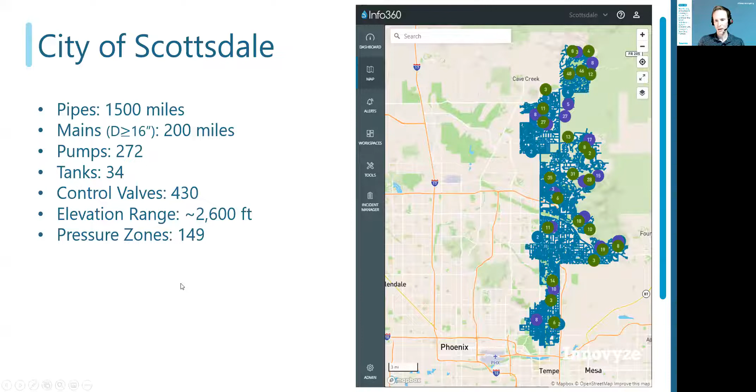So that's their system at a high level, and some of their objectives coming from that is that they want to have dashboards where they could manage the pressure, review pressures throughout the system, get a quick understanding of pressure variations, and have alerts on demand of pressure exceedance instances.

In addition, their system is broken into 4 separate zones or areas, so we are doing mass balance, which basically sums up the volume being used by each isolatable area. I'll highlight which areas we can isolate, since this is not a full DMA system like some of our other global users. So mass balance analytics I'll be getting into.

Also, with a number of their pumps, they are going to be using some of our pump efficiency analytics and reporting, so I'll show that. And then finally, one of the big drivers of this project was model integration. Because we're able to tap into their SCADA data, we can connect that to the model to really streamline model updates, even use the model for operational understanding. So those are some high-level objectives that I'll be stepping through.

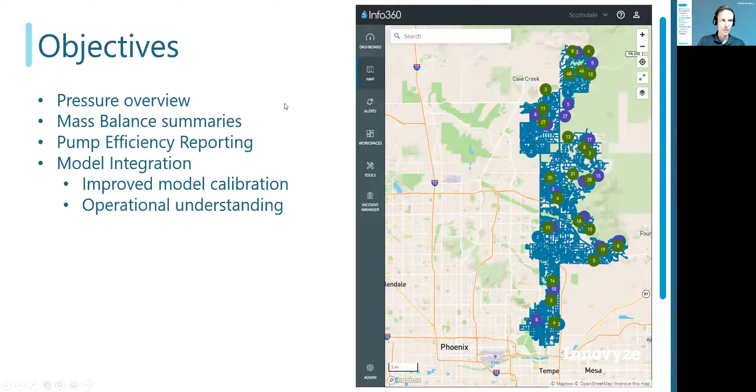As far as the actual project, what that project looks like, we start off with a project kickoff to outline the different timelines and deliverables that we will be working on with them. We define the system - we actually deploy a data ingester, is what we call it.

Info360 itself is completely a cloud solution hosted by Innovyze, and so we have a software component on site that pulls their SCADA data in real time and uploads it to our cloud. I'll come back to that in the next slide. So we import the full sensors and system definitions, and we also upload the model to get the web maps set up. That's step 2.

Step 3 is we actually deploy. So we configure all of the different sensors in their system, we define the pressure zones or DMAs depending on what you have, and we associate each of those sensors or processed sensors with model elements.

And then finally, the actual build phase, and this is where we're still at with Scottsdale, is building custom workspaces, continuing to roll out the analytics for them. Throughout this process, the user has full access to log in, access the site, play around, customize their own dashboards, and give us feedback on the dashboards that we're building with them. So we're kind of at this interactive build phase with them.

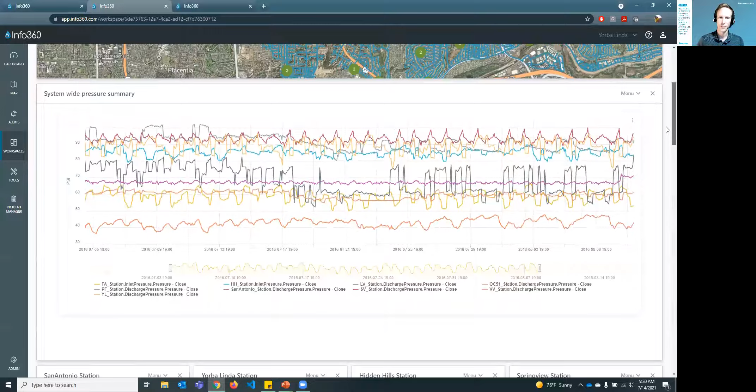So these are different pressure sensors. I can highlight the different pressure sensors, and I can overlay different alert thresholds, moving averages, or other analytics.

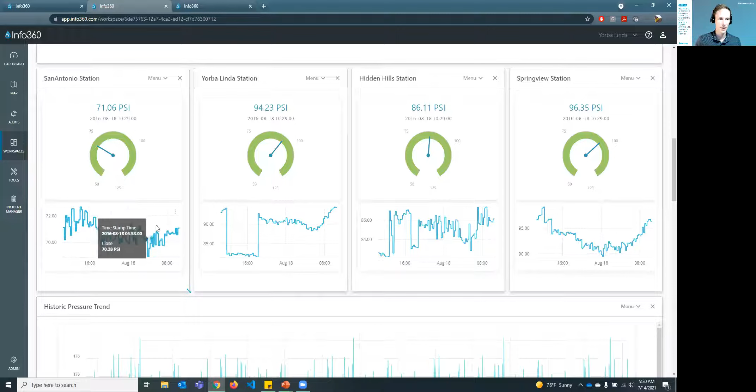If I step down, we can also look at gauge charts. In some cases, operators would rather just see at a glance the snapshot of how things are right now, one for each pressure zone, for example. So this shows the latest value and a peak at the latest 24 hours.

We can also look at a long history. This is 3 years of pressure data overlaid with a moving average, so you can see the instantaneous results compared to that moving trend.

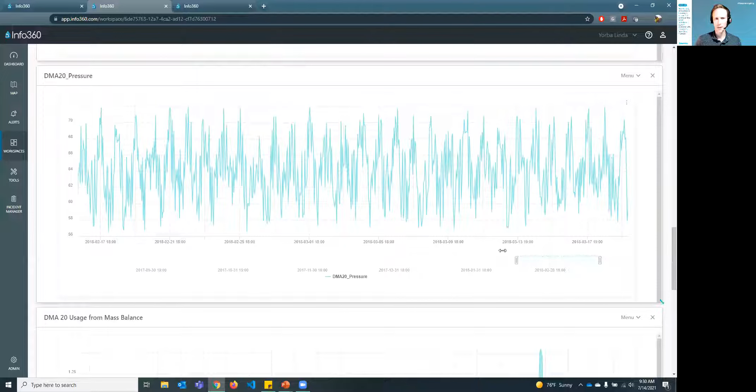Here's another example, I think this is just a 15-minute pressure sensor. You can sift along, and as we get to a certain event, the pressure drops down to around 45 PSI in this zone. One of the nice things about having all of the data accessible is that when that pressure drops, you can easily lay out these workspaces and have access to other sensors.

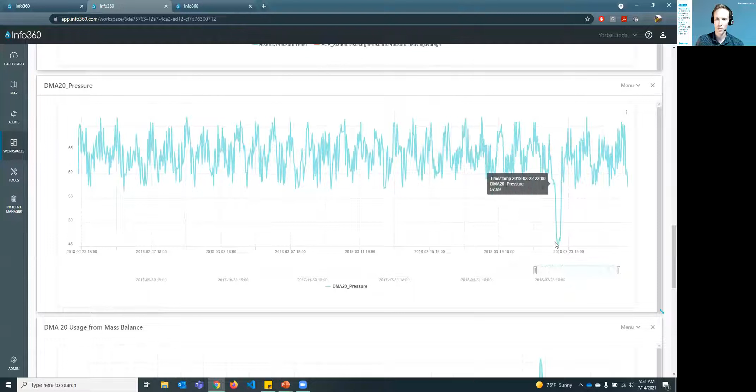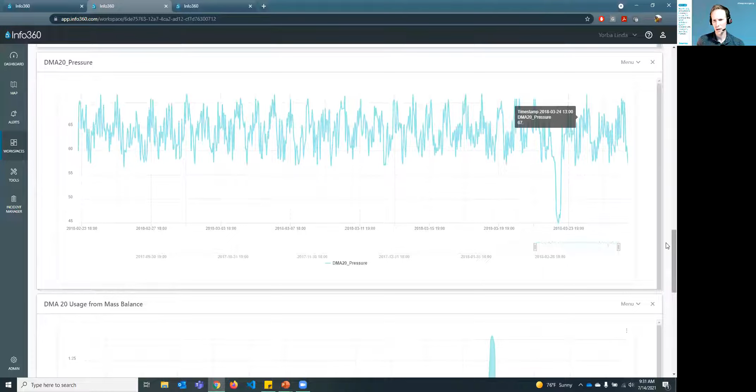A pressure drop by itself, we're not really sure exactly what that means. But one of the things we are doing is calculating the water usage each hour of the day for each zone. So here is the water usage for that same pressure zone where that pressure sensor came from. Corresponding to March 23rd, where that pressure drops, we see a large jump in water usage that same day.

I'll show where we can step to alerts in just a second. But we can also build patterns here.

So in terms of our alert thresholds, I'm going to step over real quick to discard my changes and take a look at alerts.

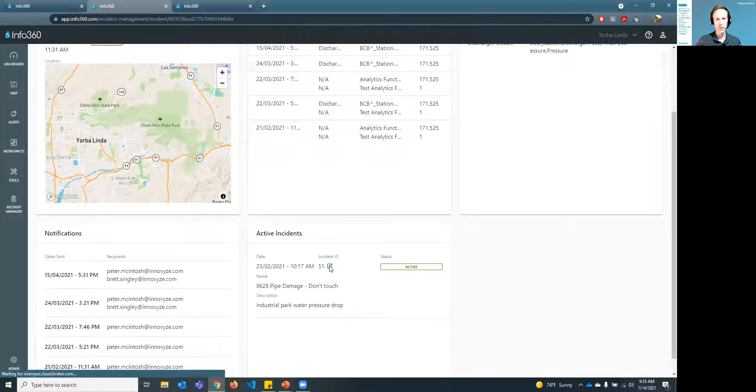Incidents are managed in a separate module within Info360 Insight, where operators and other staff have a common platform to view the timeline of what's happening with the incident. You can see the trigger of the initial alert, dispatch field inspections where workers upload attachments or images, and associate work orders to third-party CMMS systems.

Most importantly, we can also do simulation impact assessments. If I click on this impact assessment, I'll step to a different one. Users have a simple web interface for common workflows to simulate hydraulically what would happen under this incident. In this case, this was a low flow and low pressure alert that was triggered.

Within the UI, non-modelers can set up a basic handful of parameters to trigger a simulation. In this case, we have a symbol where the pipe break was established, on a certain asset, asset 12708. You can define the maximum break flow, and we insert an emitter coefficient on that pipe starting at this time of day, 7 a.m.

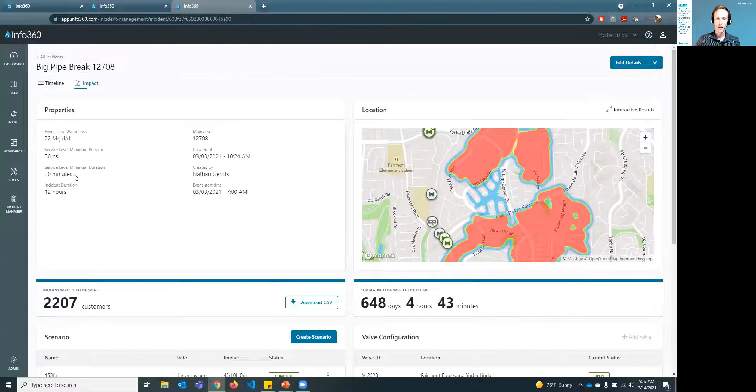We then simulate how many customers would be affected by that condition. In this case, the user can define that customers are affected if they go below 30 PSI for at least 30 minutes. Both of those are user configurable with a default setting.

So in this case, if I zoom out, we have 2,200 customers, and you can see a heat map of where those customers are affected, which sums up to 648 days of total loss of service hours — pretty detrimental to the utility, because I chose a pretty large water main for this impact assessment.

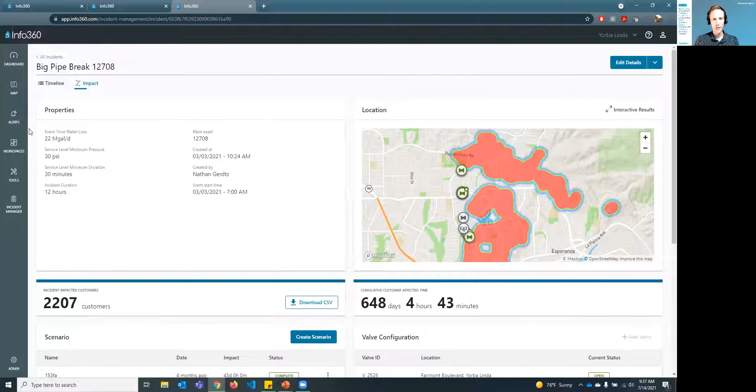Fortunately, because it's on a large main, we're pretty likely to detect it using SCADA. If you don't have that, a customer might even report it within an hour given that magnitude of a pipe break.

We can also view the pipe break within the animation viewer. If I click play, you can see a heat map of where and when we have affected customers. This zone starts to get some supply during the break, but eventually the storage in these upper pressure zones starts to run out, and we'll see affected customers up there starting in these later hours.

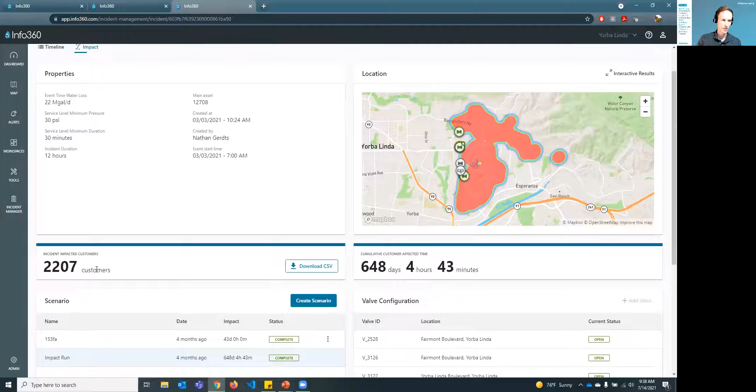The impact actually evolves over time, and in reality a utility will be able to start closing valves before we see all 2,000 customers impacted. With that, you can create new scenarios, and it will detect which valves can be used to isolate that pipe, and you can then close those valves.

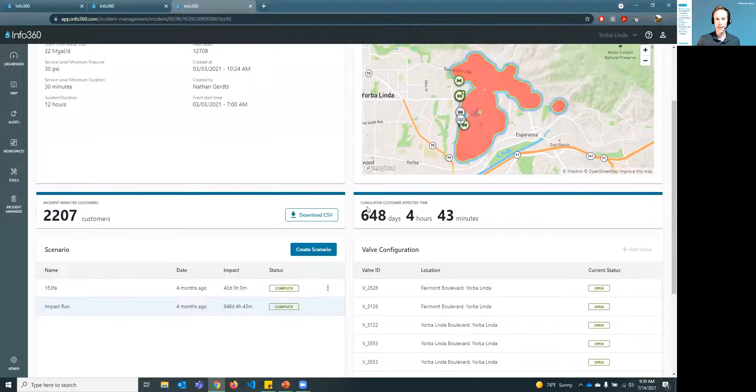You can specify a time. It will detect in our asset database if valves are already flagged as inoperable, or if they're already closed or open. If a user flags a valve as inoperable in the UI, it will then trace downstream from there and find the remaining valves required to isolate it. Then you can simulate various isolation events.

So in this case, you can see once we close off those valves, we only have 86 customers, which are the customers in that one specific closed-off, ponded area from the valves. You can download the CSV, get those GIS coordinates, the customer addresses, and any other information you choose to include in our project shapefile upload that's web mapped.

I think that is some of the main walkthrough of the software. I'm going to step back to PowerPoint to finish off.

Some of the analytics we are setting up for Scottsdale include a mass balance for the water usage. This is where we report the water consumption in an hourly time series for each zone we can isolate, or the total system. And if we have billing data, we can also include the non-revenue water. If it's hourly, we could do a non-revenue time series; otherwise it would just be monthly, depending on whatever time scale you have for that billing data.

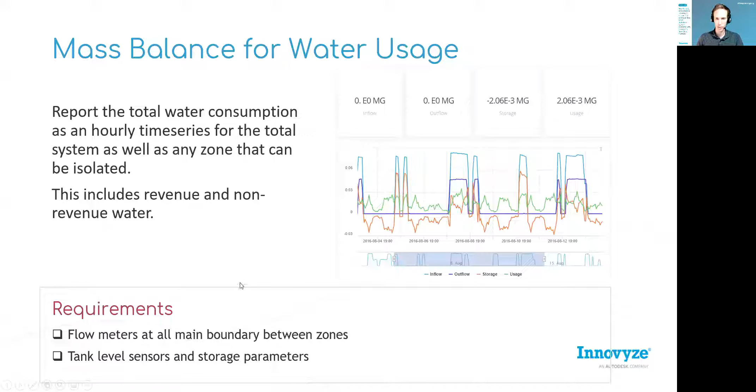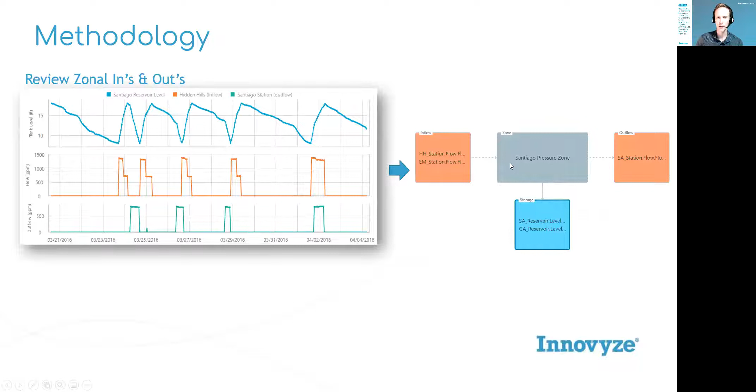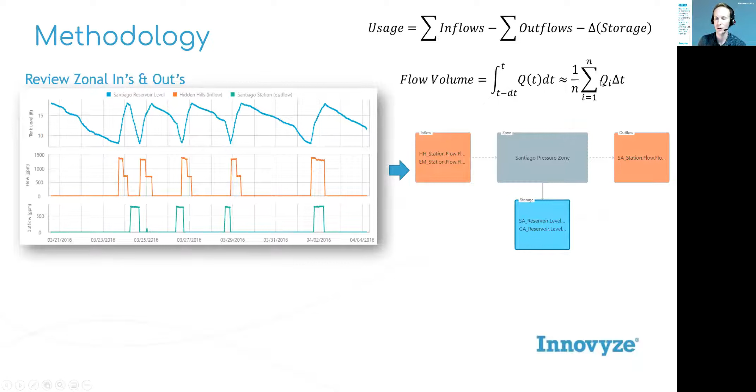The requirements are flow meters at all main boundaries between the zones, and tank levels with their storage parameters. Just a quick note on the methodology: if you have a zone where we have a tank level going up and down, and pump stations flowing in and pump stations flowing out, from the UI we can just drag in those corresponding sensors into our mass balance network. We do simple mathematics, summing up the inflow volumes. For the flow, we integrate the volume over time based on the time steps you have for your actual flow data, and the outcome is that diurnal time series.

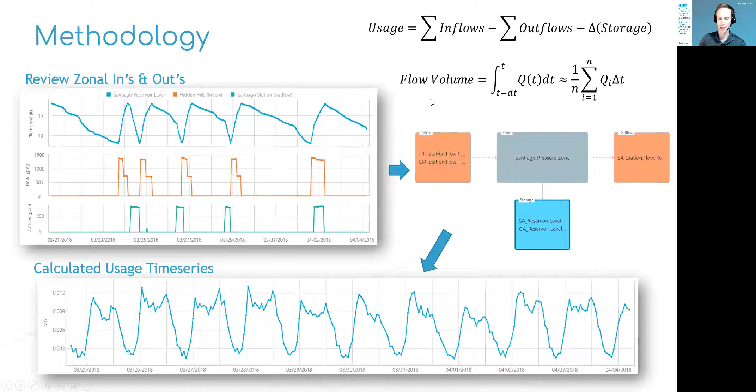This is a pretty foundational thing that you may already have if your system has DMAs, but I know in North America, where Scottsdale is, not many have this, or not many have the paring down at this kind of scale. So where can we set this up?

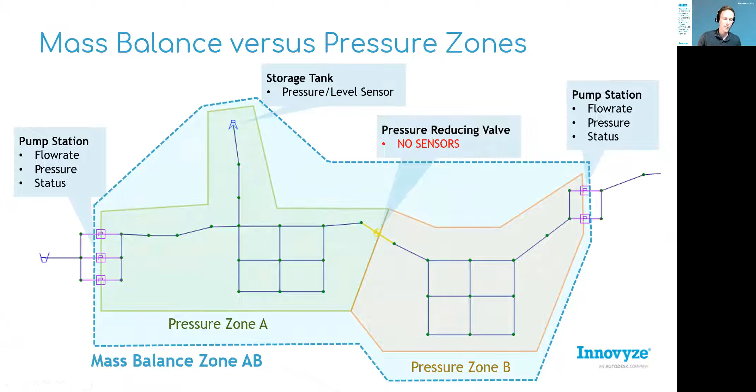That's one of the things we're going through with Scottsdale. They have 149 different pressure zones, but they have a lot of instances where there are PRVs where we can't isolate, so we are doing mass balance where we lump together zones. There are a lot of benefits, where we can do leakage reporting and burst analysis on those lumped-together zones, and then we can help them identify prioritized locations where adding a flow sensor can divide up your analytics and get you a lot more value out of what you have.

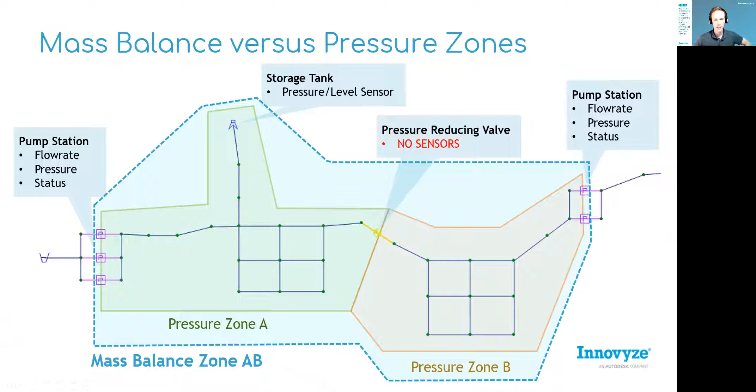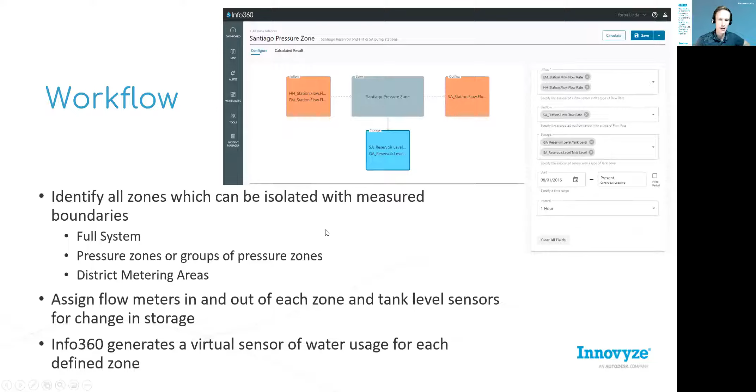So the workflow — this is the UI. Don't need to go into too many details because we can help set this up during our implementation, but there's a UI where it's pretty seamless to just drag in the sensors for the inflows, outflows, and storage and set that up. Then it generates that time series like a virtual sensor in real time.

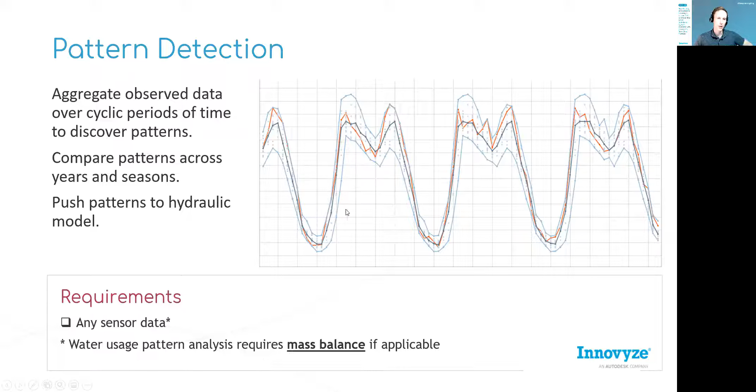Step two, the outcome of that is we can do pattern detection. Here we aggregate together the patterns from that data. This is a chart looking at water usage where we overlay the current values, in orange, against a moving average of the past two weeks in dark gray, and the high and low range from those last two weeks. We can do pattern detection on any sensor you have, but it's of particular value on the water usage — that would use the mass balance if we have that available.

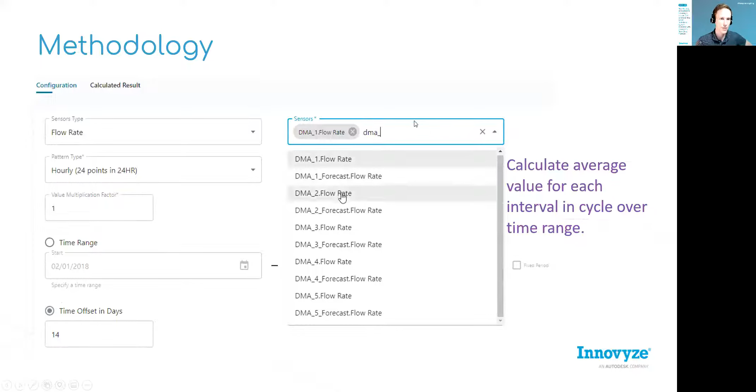There's a pretty simple UI, so we can set this up for your mass balance, but users can customize these different patterns pretty easily using the interface.

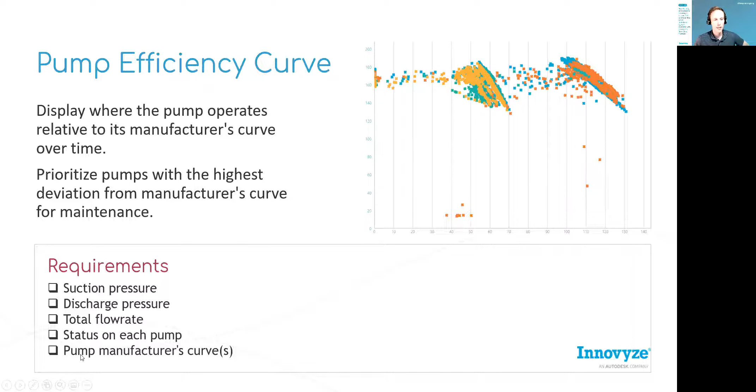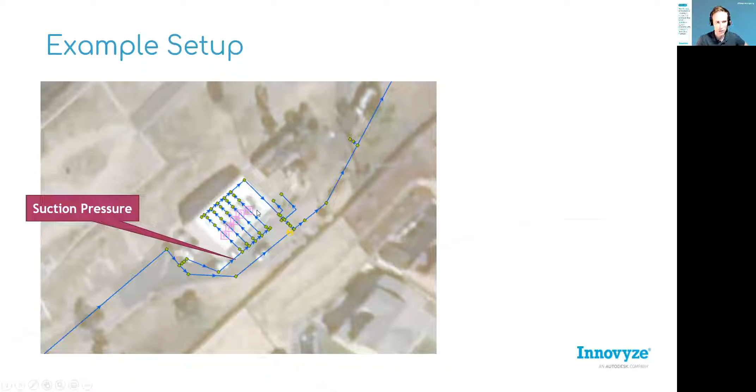Just a quick look at what that looks like. So if this is a pump station with the flow directions, we usually have a suction pressure sensor around there, and a discharge pressure sensor. We need the total flow rate. Usually in SCADA there might be graphs like this that we can generate.

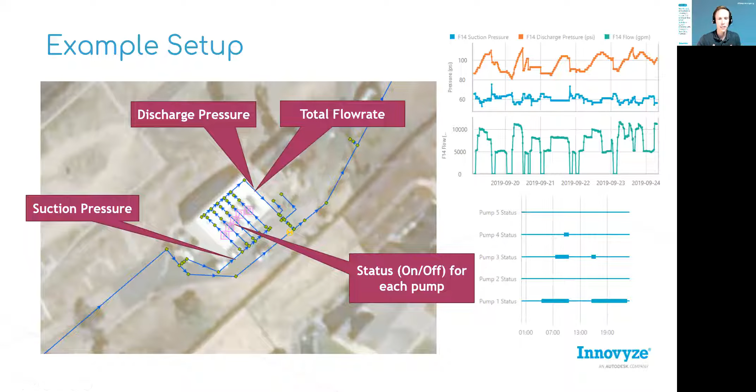And we also need, in this case, if there's 5 different pumps, we would need the status sensor for each pump so we can use these statuses to filter out the total head difference and flow rates, and then filter out the times when each individual pump is operating by itself, so we can isolate individual pump performance. So we don't need pressure or flow on each individual pump, just for the full station, but we do need the status on each individual pump.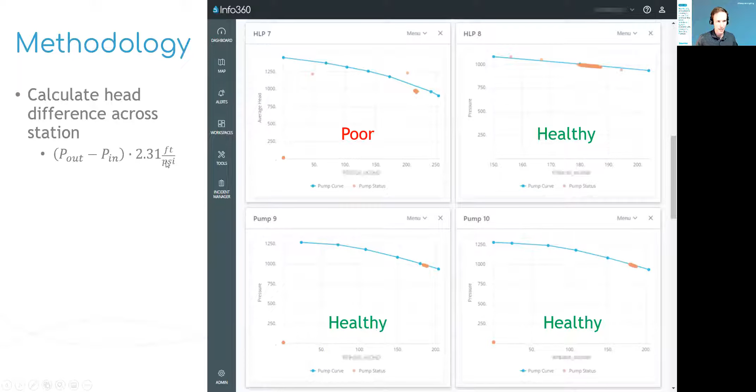The methodology is we take those pressure sensors in and out, and take the pressure difference. For our US customers, they're usually in PSI, so we convert it to feet using a simple 2.31 factor. Then we filter out flow rate time series for each individual pump, and plot the scatter of those instantaneous values for flow versus head, and compare it with the manufacturer's curve.

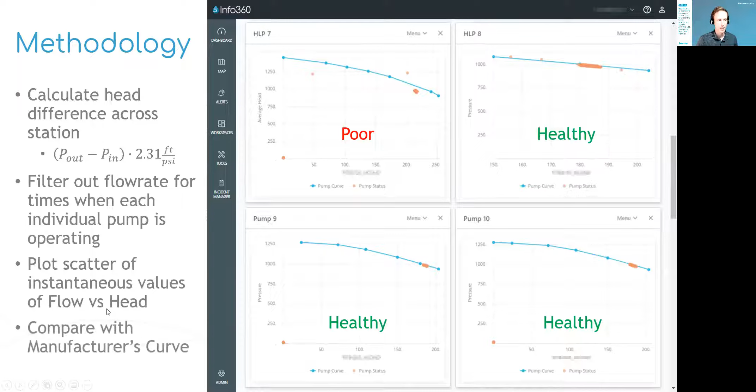We can then potentially take it a step further and turn that into a KPI for each pump. So in a schematic look, for each individual pump, each time step that the pump is running alone, we calculate the head difference. Then we look up the total flow from the head curve, from the manufacturer's curve, for that amount of head - that's value X. Then we compare that to the actual measured flow, and we can come up with an efficiency coefficient.

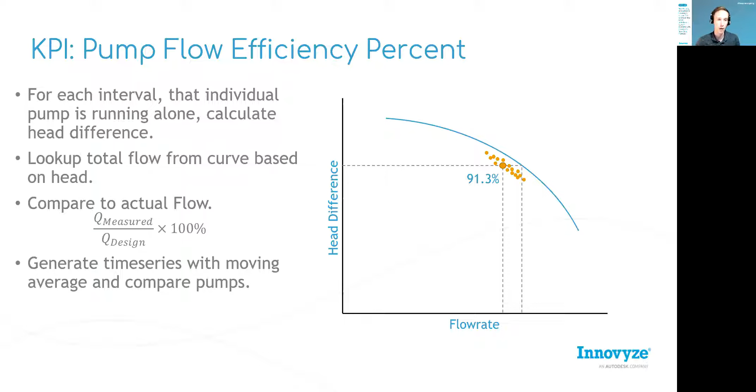For instance, for this point, that might be 91.3% of the hypothetical manufacturer's flow for that head difference that the pump is actually delivering. That 91.3% is one value, but we could generate a time series of many different values as that pump operates at different points in time, come up with a moving average time series, and then compare that across pumps to see which pumps are the farthest off the curve versus others.

We can also do break impact assessment. I showed a little bit of this in the software, but ultimately, once we have your model connected to SCADA, we can set up those dashboards. The requirements for that are we really just need an up-to-date hydraulic model of the system, and having the SCADA integrated is a key step in getting the model up to date.

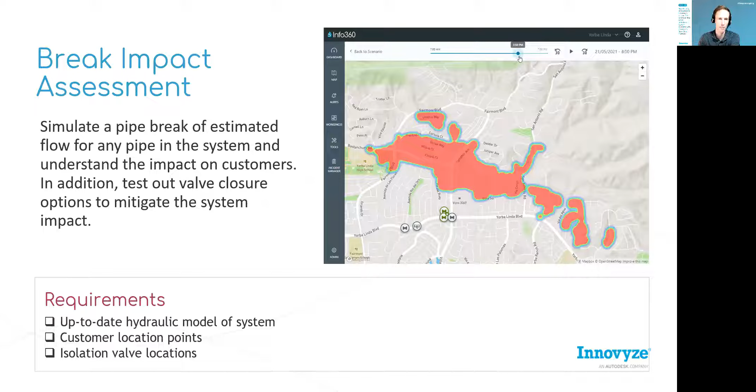We also need the customer location points, as well as the isolation valve locations. For InfoWater Pro users, we don't need those valves to be in the model - we can just use GIS points, then associate it with the nearest pipe, and close that corresponding pipe.

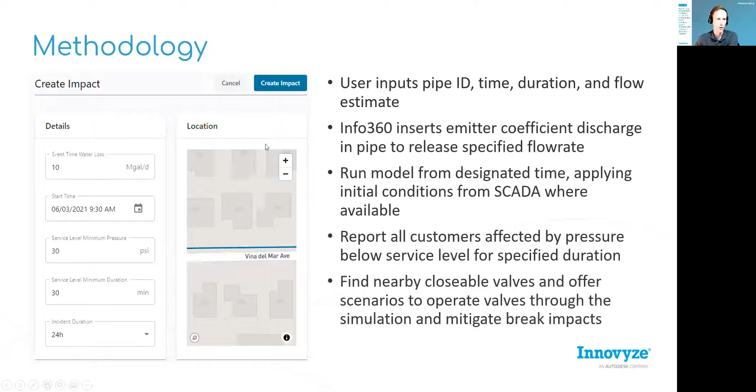So this is a little look at that workflow for users. I already showed that in the software, so I'm going to skip past that in the interest of time. I'm noticing that we have 12 minutes left.

So then the final piece is integrating the hydraulic model, which was a key driver for this for Scottsdale. The flow of data goes both ways: we can take your InfoWater Pro model and publish it to Info360. We can use that to generate the web map of model objects, and incorporate the customer and valves. We can also use the model for your designated scenario to do easy simulation management or incident management simulations. But we can also take that data from Info360, pulling real-time SCADA.

We can pre-process that SCADA data to clean it up, and then bring that back to the model for on-demand initial conditions. We can take that mass balance water usage profiles, create those patterns I showed earlier, and bring those directly into the model for the process demands.

There's also a gap analysis dashboard, so once you choose to run a SCADA run for any event, like say yesterday, you input that date, run the model, and get a dashboard for how your model compares against the SCADA data for that date and time, incorporating initial conditions, the demands, and in upcoming feature development, we're looking to bring over all of the pump control time series and so on.

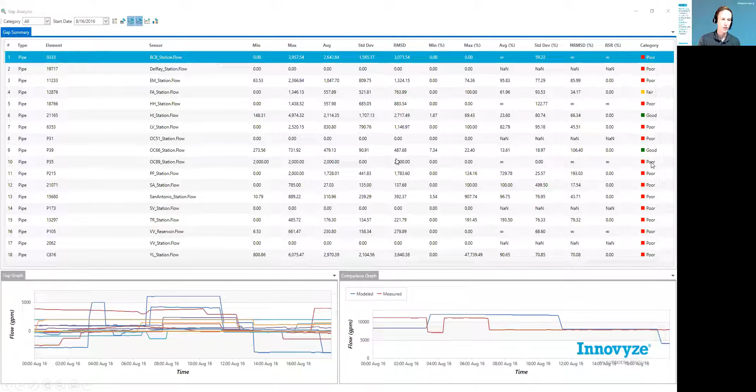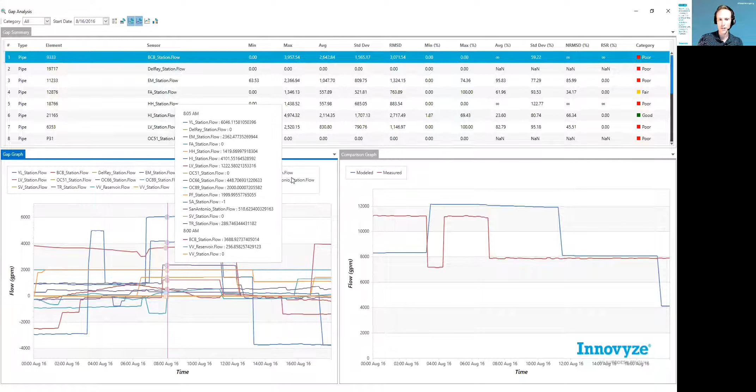So we're doing a lot of work right now in InfoWater to really streamline the calibration of models now that you have Info360 SCADA data, and that has been a key workflow that our users get hung up on is ease of calibration, because it can be a challenging process.

So what are the benefits of improving that calibration process and actually keeping a water model current? We have one of our users we did a webinar on a year ago where they're actually doing bi-weekly model validation against SCADA, keeping their model validated on a regular basis, so anytime operations asks the model a certain question, they have confidence that their model is up to date.

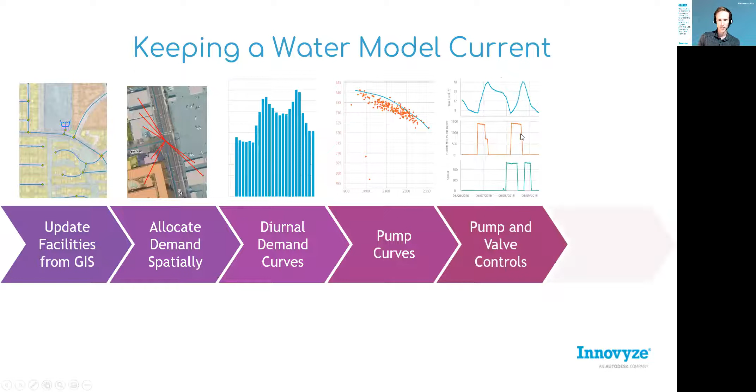So how do we do that? Well, you have to update the model facilities from GIS, allocate demand spatially, bring in those demand diurnal curves, update your pump curves, update the controls from SCADA, and then actually do the calibration and employ your modeling expertise to know what parameters need to be changed. This is what is needed to keep the model current.

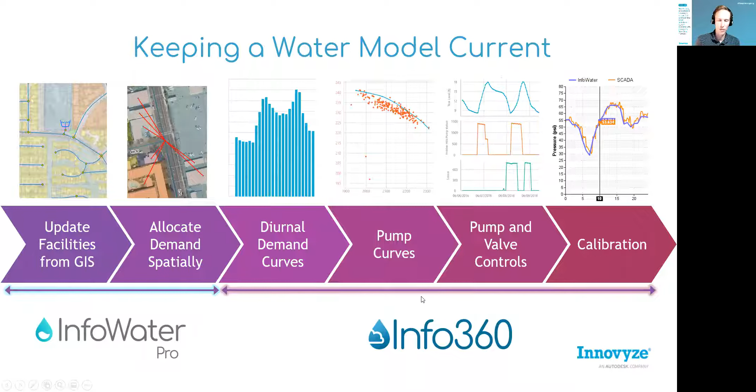These two functionalities are embedded into the InfoWater Pro workflows using GIS integration, but the rest of these are SCADA integration. Typically takes a while with conventional approaches, but with Info360 that's streamlined.

Some of the benefits of having that integration is with Info360 plus InfoWater, you can respond quickly and confidently to performance changes. You can provide insights to operational responses, supporting decisions with evidence rather than just anecdotal evidence. You can also do water quality assessments once your model is reliable.

You can understand system behavior between gaps in sensors. You can't deploy a sensor at every single location - that could be cost prohibitive - but once your model matches those sensors that you do have, you can then trust the model in between the sensors with more confidence.

Keeping the model up to date on a regular basis can really reduce the upfront costs on master plans. This is money you often need to spend anyways in the long run, so keeping the model current and shaving off that time really helps you benefit with all these other things in between. That's just a high level benefit.